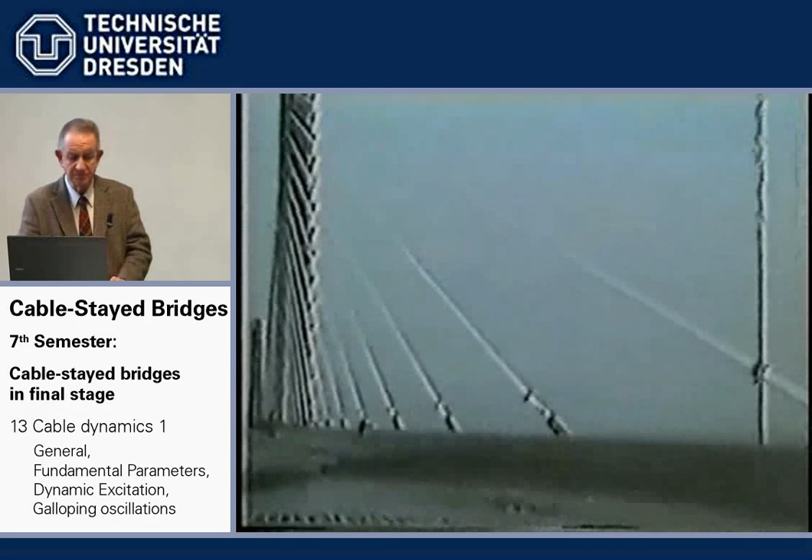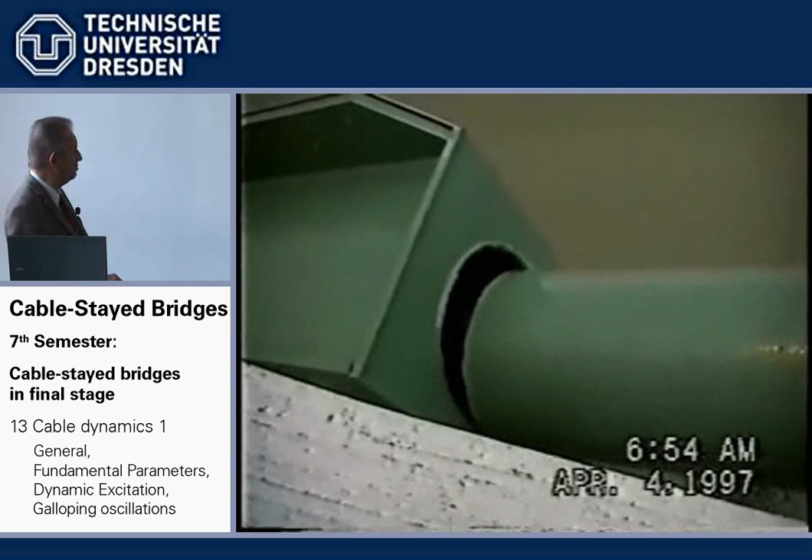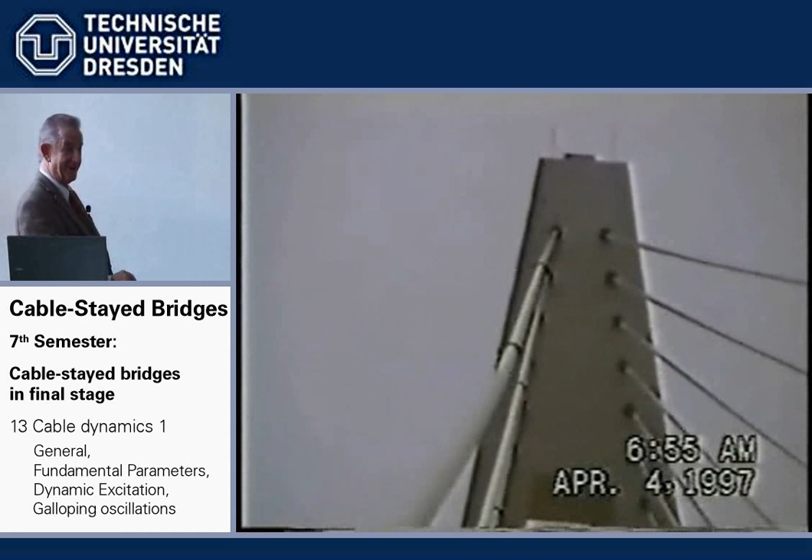This is with light rain and light wind. It is rain-wind induced vibrations on a bridge, and you can see, well, you can't see very much, I'm afraid. It was just, of course, the Houston Ship Channel Baytown Bridge, which we see in great detail. There wasn't very much wind, but this was enough to heavily oscillate the cables, which can damage the anchorages and which can damage the cables. So we're talking here of a real problem which can occur if we don't look out for it.

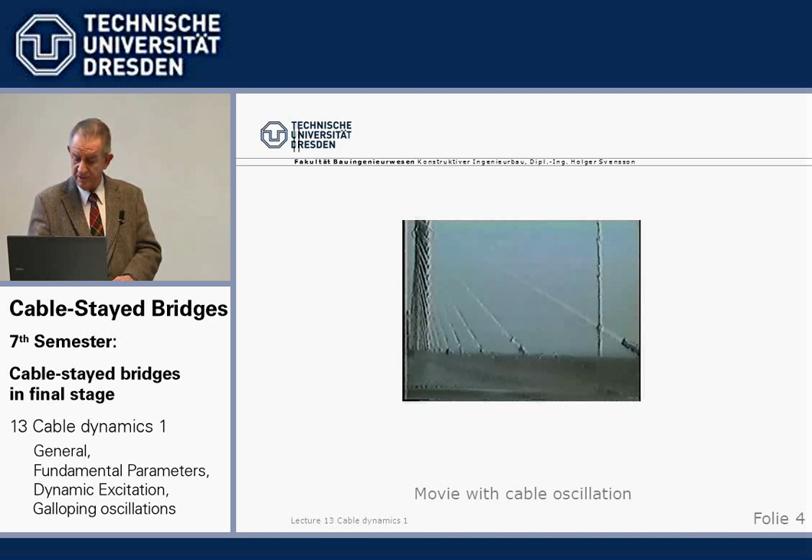Here we go. Now, very important, stay cables have very low internal, say, natural damping.

What we have done here is measure the decay of a stay cable at the time of the Pasco-Kennewick Bridge. We could show in a mathematical formula, very typical, how the decay curve runs. It was e to the power of minus 0.012. Now here we have something which is often not understood: the logarithmic decrement of damping. We know logarithm is something to the power of, and the logarithmic decrement is the power to which e has to be raised to show the decay curve. So 0.012 is in this formula, the decay formula.

That's important, that it's not something in the air. It just indicates how the cable decays when you start it by hand or with a rope and the cable oscillates, and then you measure how the amplitudes become smaller and smaller, decay with time. Here after 120 cycles it was only 20 millimeters. We started with 80 millimeters. This decay is given in an E function, and the logarithmic decrement is the power to which we have to take E.

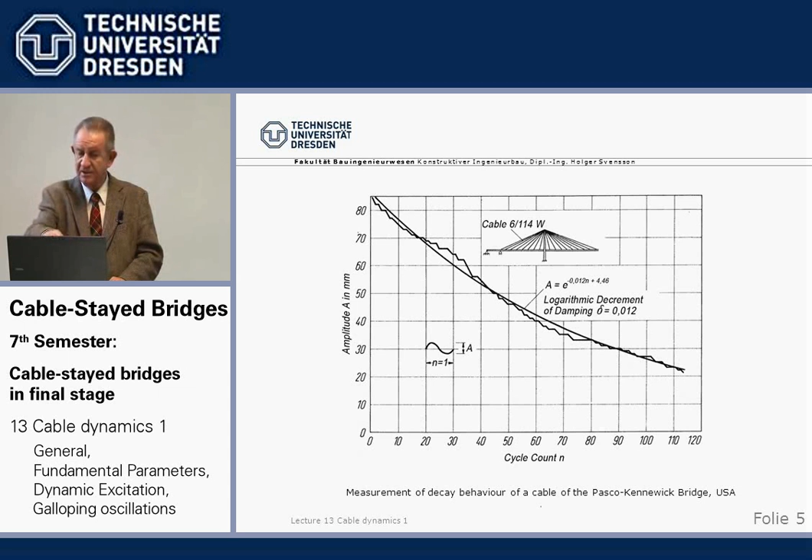0.012 is very small, something like a fifth or a sixth of regular steel structures. That has to do with the fact that we have stressless deformations here. When a cable deflects, it basically doesn't change its stress, and the force which brings it back is just the radiating force from the tensile force. If we bend it, we have forces which try to get the cable back, but it has nothing to do with inner workings. That's why, because it's a geometrical stiffness instead of a structural stiffness, we have very low damping values, the lowest in practical engineering there is. That's why these cables are so sensitive to even small wind forces. So that's what you have to keep in mind: geometrical stiffness, very low damping, 0.01 or something as the defined logarithmic decrement.

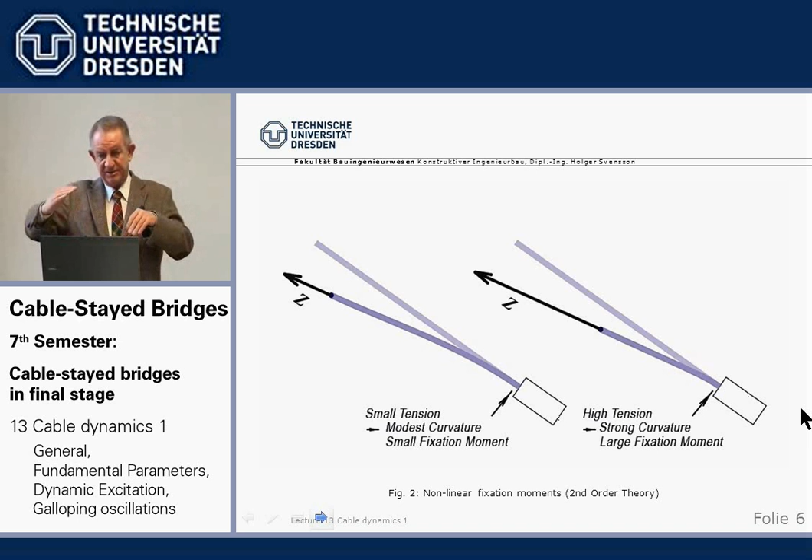The second important point why these cable vibrations are dangerous has to do with the second order effect under tension. I showed you in an earlier lecture the formulas for how this works. In principle, it is like this: if I have a cable with a certain stiffness, and I deflect the beam, there will be a deflection between the cable and the anchorage. This change of angle and the stresses from that are increased many times by the tension which acts at the same time. In first order, linear theory, we just have a certain radius depending on the stiffness, and certain stresses. However, if we have a tensile force, this radius becomes much smaller.

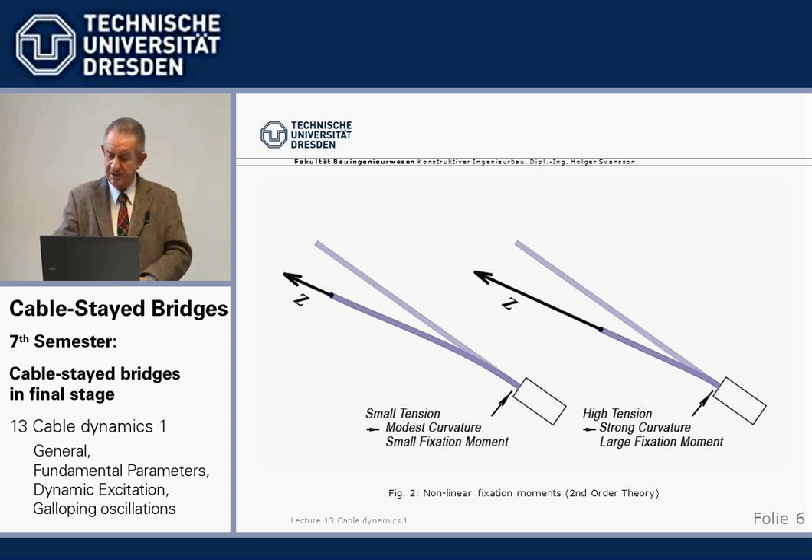It's pulled together, so to say, and this nonlinear effect due to bending and tensile force increases these stresses considerably. It's a condition in cable sizing to keep that low. So fatigue due to high bending stresses from nonlinear theory, tension and bending, is dangerous. Those are the two basic characteristics which are unfavorable: low internal damping, and the increase of bending stresses from cable oscillations due to nonlinear theory.

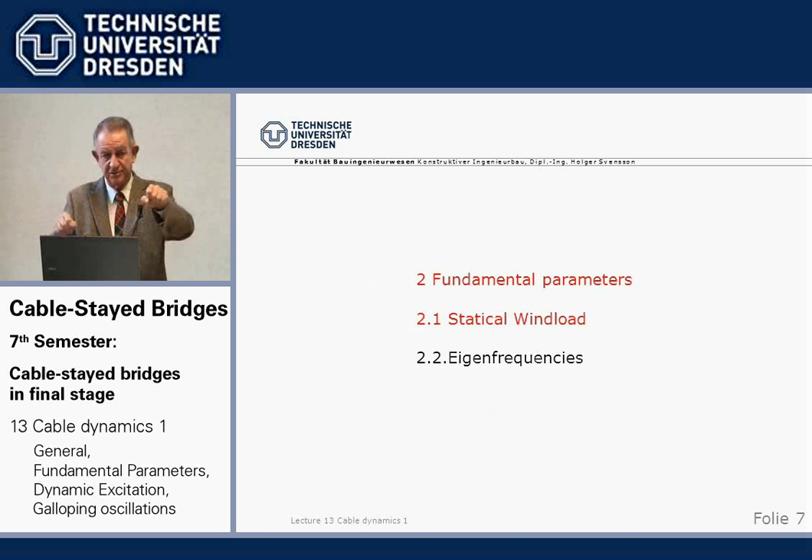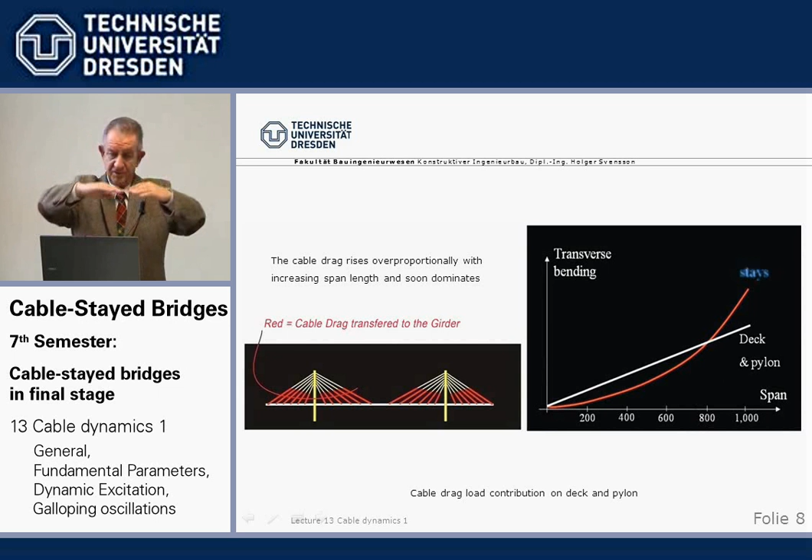For the bridge, the stay cables exert wind loads. If we have the cable-stayed bridge and the wind is blowing transversely, the static force which acts on every cable over its full length—one half goes to the tower and the other half goes to the beam. So the beam has a wind load not only from the beam itself, but also from the lower half of the stay cables. The interesting thing is, if we increase the span somewhere typically in the range of about 800 meters, the transverse bending moments in the beam from wind are bigger from the loads on the stay cables than on the beam itself. So it is an important factor for transverse bending.

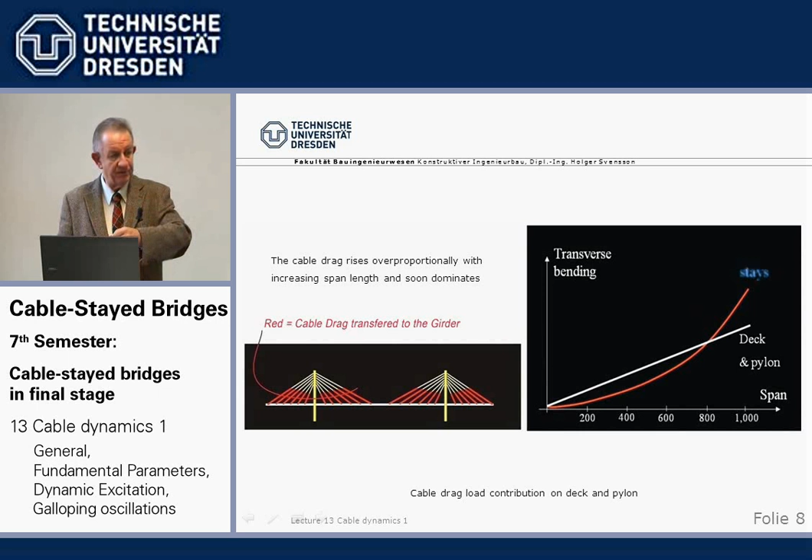The wind load on the stay cables is transferred to the beam. First, for short spans, most load on the beam comes from the beam itself. With increasing spans, that becomes a bigger part, and somewhere above 800 to 900 meters, generally the wind loads from the stay cables are higher than the wind loads on the beam itself. So it's an important sizing parameter, the wind load from the cables on the beam.

Now, how can we try to reduce these wind loads on the cables which act on the beam? First of all, the wind load is some wind speed squared times a constant, times the diameter of the stay cable, times a shape factor. The wind speed is given, so we can vary the diameter and the shape factor.

With the diameter, one has tried with time to reduce the cable diameter as much as possible. It started with a large distance between the parallel strands or wires for corrosion protection. Then compact stay cables were tried, where this is more or less directly extruded. With the wires, since these are fabricated on site, we cannot make these too tight - we have to thread in the strands. But if we use completely shop-fabricated HiAm parallel wire stay cables, then the PE pipe can be directly extruded very tight. So in practical terms, for big bridges, maybe 20 years ago there still were 300 millimeter diameter stay cables, and they are now reduced to something like 200 millimeters. So what has been done there to reduce the drag has been done.

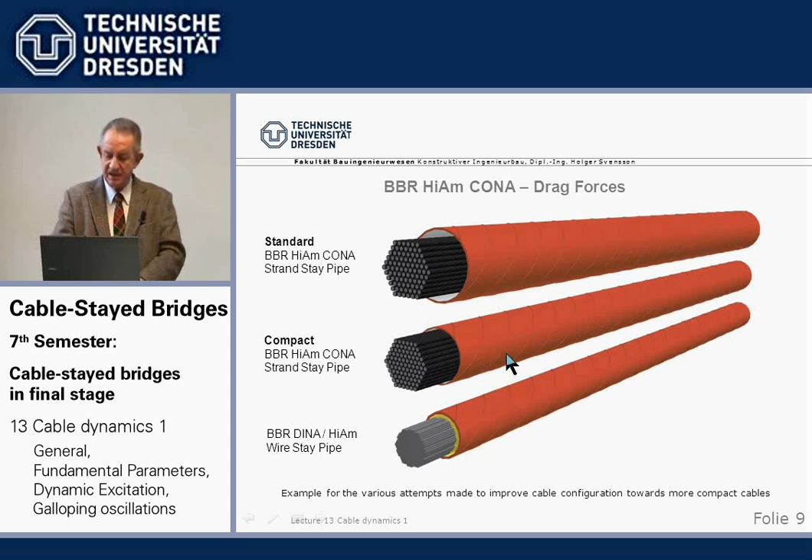The next question is the drag factor for a circular cross-section. It's interesting that this is not just some constant value - we have here the C factor, and we have here the Reynolds number. The Reynolds number is basically the wind speed times the diameter of what we are talking about, divided by the kinematic characteristics of the air, which is a constant.

If we use stay cables, we can give this factor as a cable diameter, which is much more helpful. We see here say 5 centimeters, 10, 15, 20, and so on. Now the interesting thing, as I've mentioned several times, is that Reynolds to the power of 10 to the power of 5 gives a change in the internal characteristic of the wind, from laminar, just steady, to turbulent, with vortices and all that. That's always a very important point in all bridge engineering, this Reynolds factor of 10 to the power of 5.

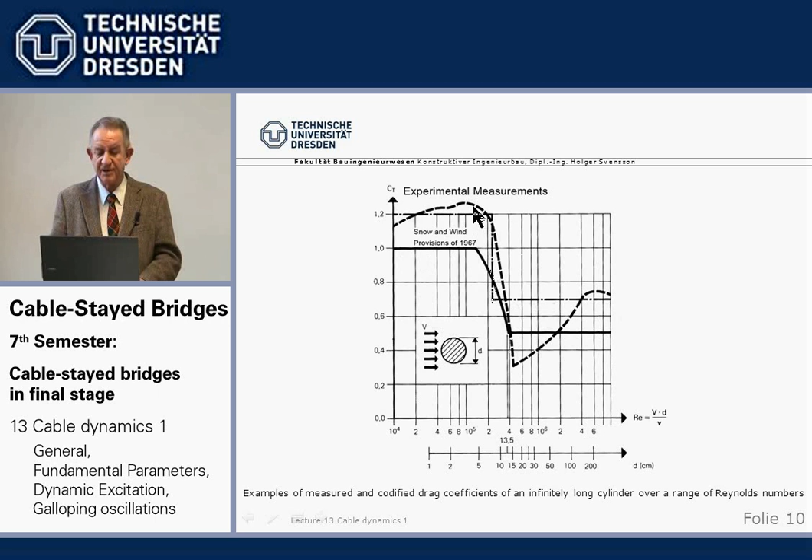For the diameters we use, up to 10 centimeters, we can use low factors which are codified. These are some old codes here in that range, somewhere between 0.5 and 1.2 as a drag factor. So if we now say, okay, we accept from these various code regulations all over the world, we accept 1.2 up to, say, a diameter of somewhere 10 centimeters of a stay cable - that's easier to understand than the Reynolds number here underneath. And then we accept, well, 0.7 to 0.8. The codes vary there a little bit. So that's the drag factor.

That's a natural constant. I just point out here an interesting phenomenon which we will come up later. We can further reduce the drag factor, meaning the resistance a cable has against the wind, by profiling the surface. At first it sounds a little strange - how can you, if you so to say roughen the surface, how can the drag factor, the resistance, go down? But it does, because there is a change in the internal structure of the wind as the cable comes and goes around, and the vortices are further pulled out. The point where these two go into two pieces is further to the leeward side. If somebody of you plays golf, you may know that the later golf balls have little dimples on their surface, and these dimples reduce the drag on the golf balls.

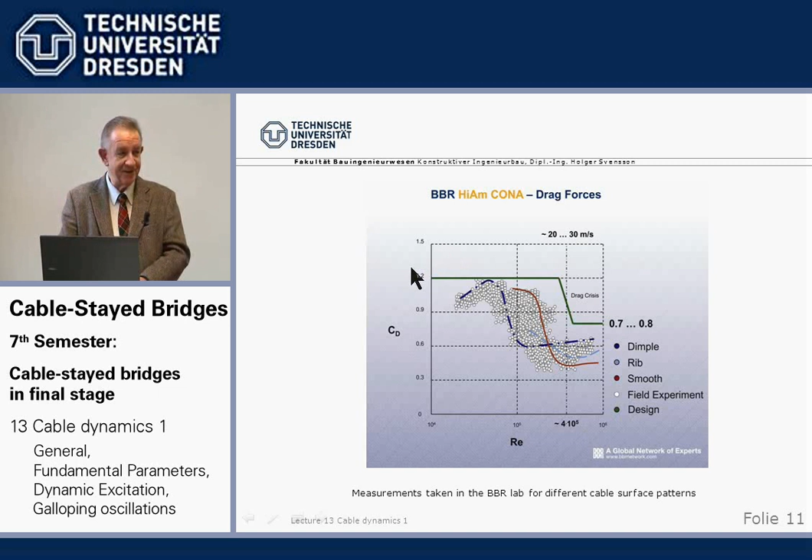Of course, whenever we start to calculate anything with cables, the first thing we need are the eigenfrequencies. Very simple. We just have to remember the eigenfrequency of a cable is proportional, first of all, to the square root of the cable force. The more taut a cable is—think of a violin—when you pull that, the faster it will oscillate. That's very simple. And on the other hand, it's indirectly proportional to the length. We have a feeling when the cable becomes longer and we start to push it up and down.

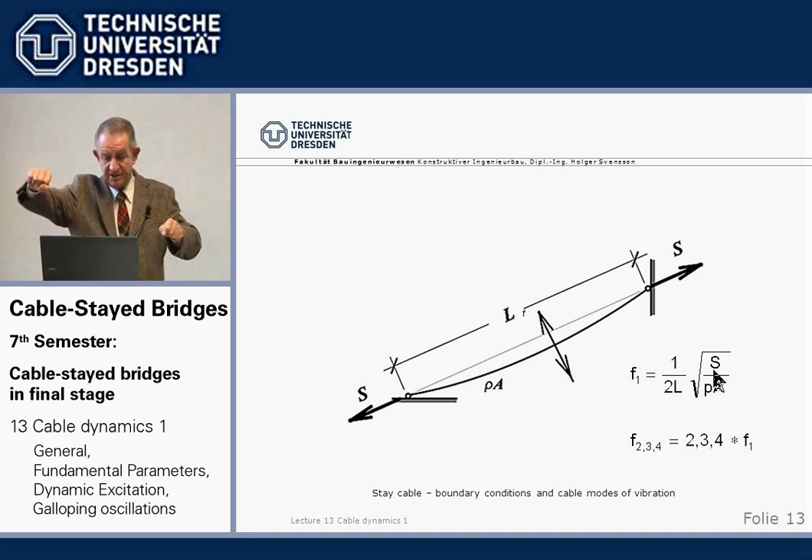That's the first eigenfrequency, which I think in 95% of all phenomena in dynamics, we only deal with the first eigenfrequency. The others are an octave higher, we know all that, but they are linear. Just remember: proportional to the square root of the tension and inversely proportional to the length.

Now we come to the dynamic excitations. And there we have, in a very general way, not only for stay cables but for all dynamic phenomena on buildings, to distinguish between catastrophic events, which can go beyond all limits and basically destroy the structure, be it a cable, a bridge beam, a lamppost, or a high-rise building. So there are some nonlinear effects, and we must understand how the energy required to destroy a structure is taken out of the airstream. Those are the nonlinear catastrophic things.

And then there are others which are more static in nature. That means we get deformations or cable oscillations, but they are limited. It's basically a static load, not going beyond all limits, pulling more and more energy out of the stream like the catastrophic ones, but more a static load which gives a limited oscillation or deformation. Those two are from outer wind sources. There is also internal excitation—we don't need wind for that. That has to do with whether the eigenfrequencies of the beam, tower, and cables are in certain relations, 1 to 2. That's what we basically have to discuss in dynamic excitations.

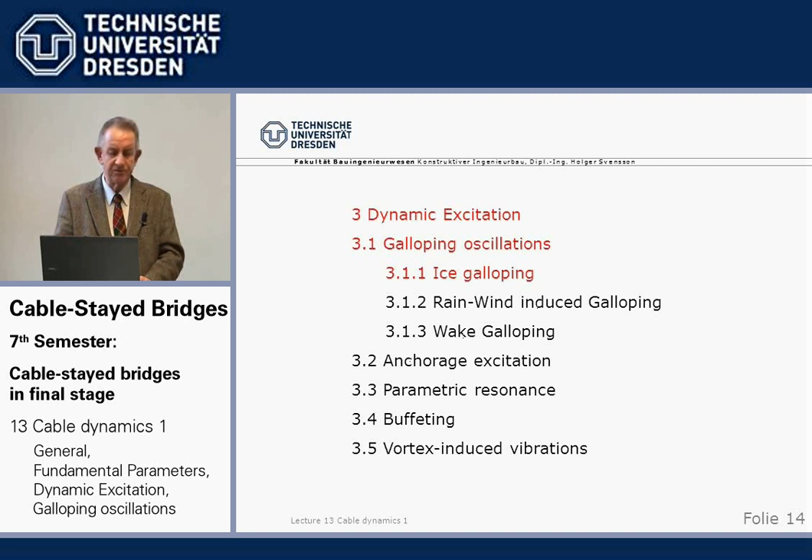And we start with one dangerous and not yet fully understood phenomenon—basically the galloping—but the most important then is the rain-wind induced vibrations. Now I want you to understand, it's rather important, the phenomenon of galloping.

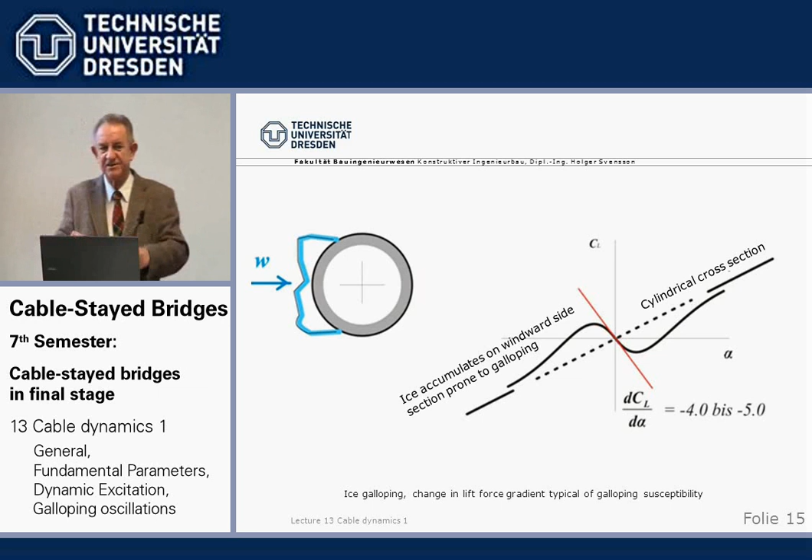Now, a special case of deforming a circular section to something where the wind can get hold is the so-called rain-wind-induced instability. What happens is that with light wind speeds, now 10 meters per second, times 3.6 is 36 kilometers, if that tells you more. It's a lower wind speed.

And rain. We have the phenomenon that at the top side, a little bit to the leeward side, and at the bottom side, the rain just doesn't run away, but forms small rivulets, small little rivers of water up here and down here, which are kept in place by the wind going around the cable and exerting certain forces. And these little rivulets apparently are sufficient to cause galloping, important galloping oscillations.

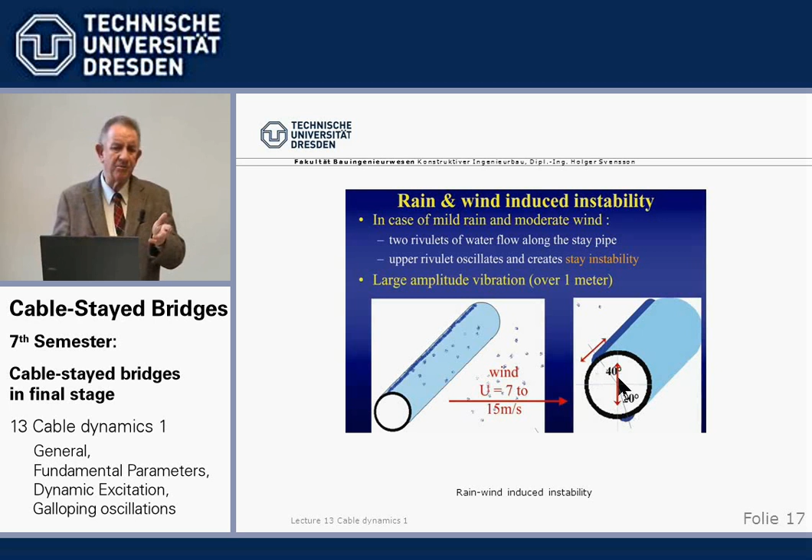What we've seen here in the first movie were galloping oscillations, light wind and light rain. You saw the cables were going up, down a meter. So it's an important phenomenon. Remember: low wind, little rain, forming rivulets which make from the circular shape some deformed shape where the wind then can get hold.

The thing is, I always say, rather new. When I started doing cable-stayed bridges, it wasn't known in the 70s. And then somewhere, somebody in Japan detected it and investigated it. And then all the other stay cable bridges learned from it and also applied it. It's a phenomenon which came up in the last 20 years.

Well, it probably has to do with the fact that cable-stayed bridges have become, first of all, longer spans, lighter, and so they are more sensitive. But this phenomenon wasn't known 30 or 40 years ago, and it's not fully understood, and I'm quoting here Kovacs. It may not be surprising if I don't understand it completely, but Kovacs says he doesn't understand it, or nobody really fully understands it today. So there are still some uncertainties.

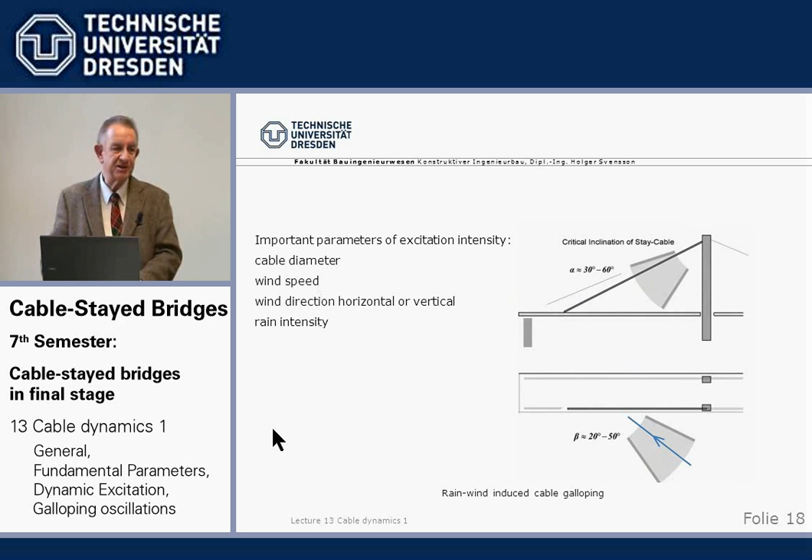But the phenomenon is there. I've shown you the movie, and there's another one later. Now, excitation parameters are the cable diameter itself, the wind speed, the wind direction, and the rain intensity, for example.

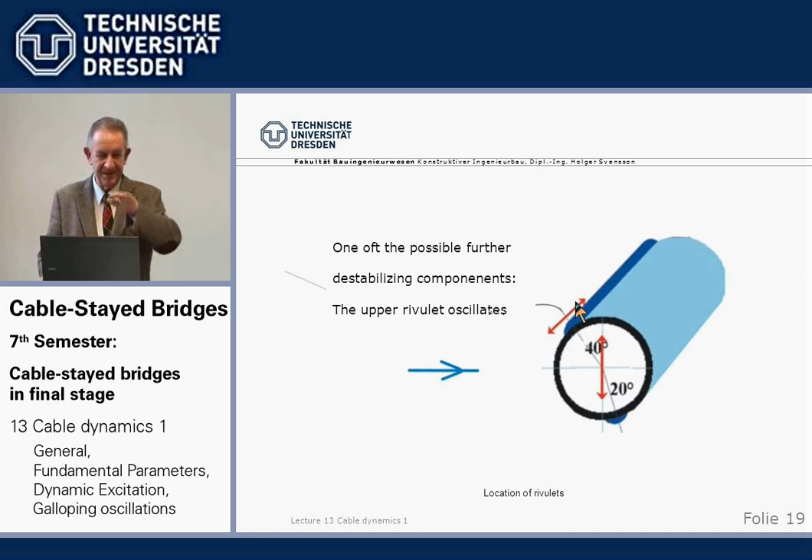If we look closely in the laboratory, it was quite a success that after many years of trying, the phenomenon had been reproduced. That was one of the puzzling things initially: you saw it on the bridge, beautiful, but in the laboratory, putting the cable on with the same dynamic characteristics, wind, rain machine on, you couldn't reproduce the darn thing. The Japanese succeeded for some time, and then they saw that in addition to forming, the rivulet itself also oscillates, and there may be something mathematically difficult to take out.

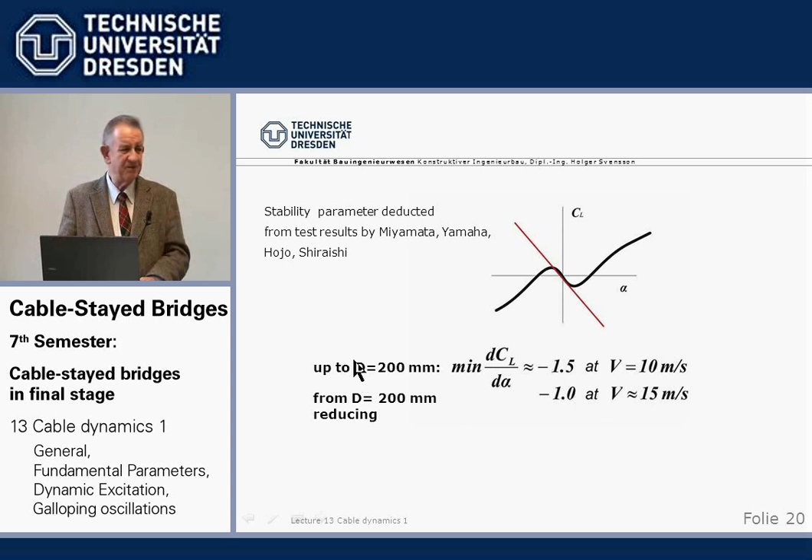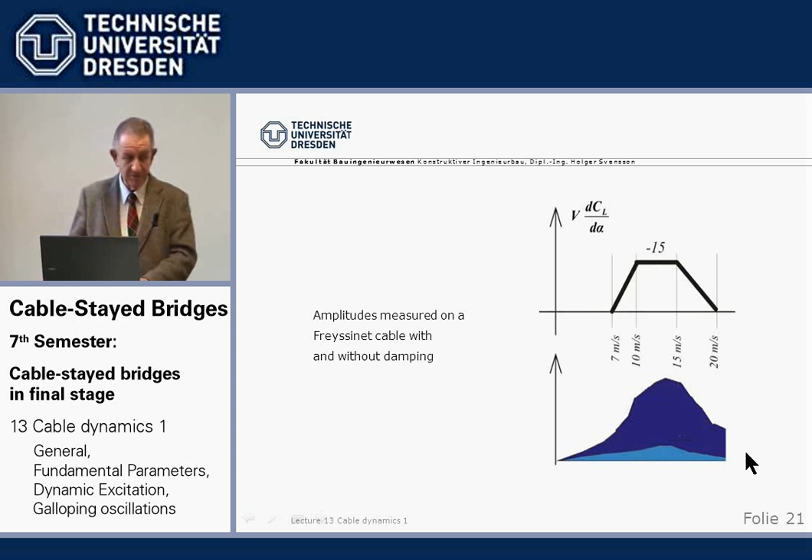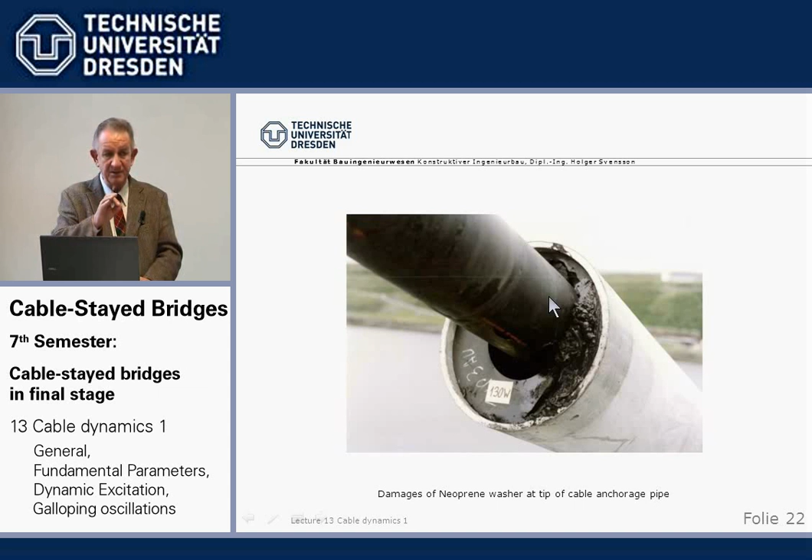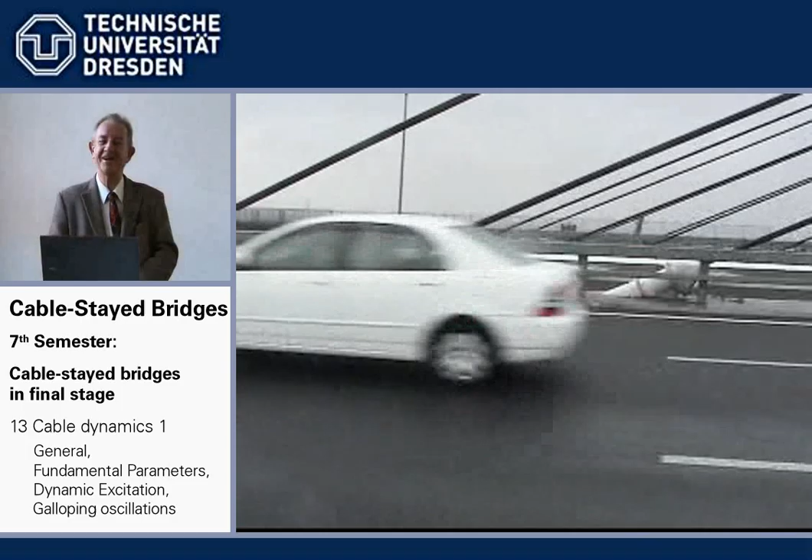And now we will go to the next movie. I agree, it's a little unattractive theme.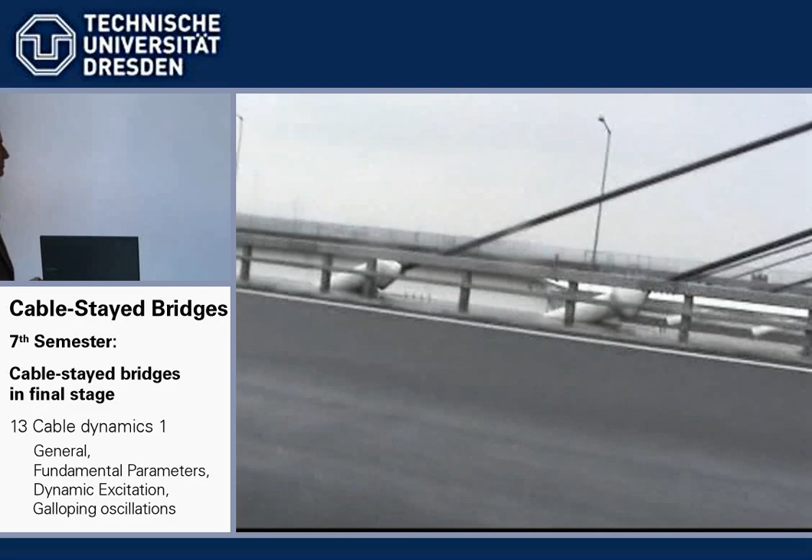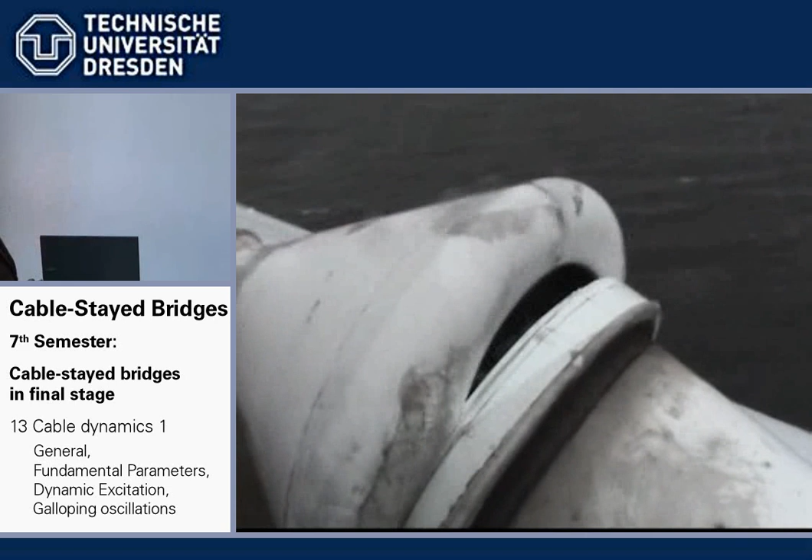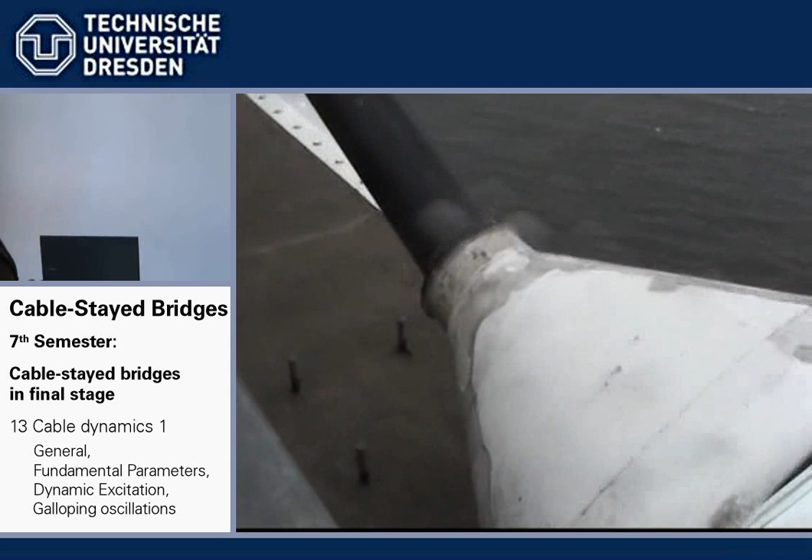This is now in Japan, probably just with a handy camera, taken from a moving car in the rain, so the quality isn't good, but you can see how the cables vibrate. Here you have the problem at the anchorages, where the neoprene boots are being pulled out. Just see how wildly they go about.

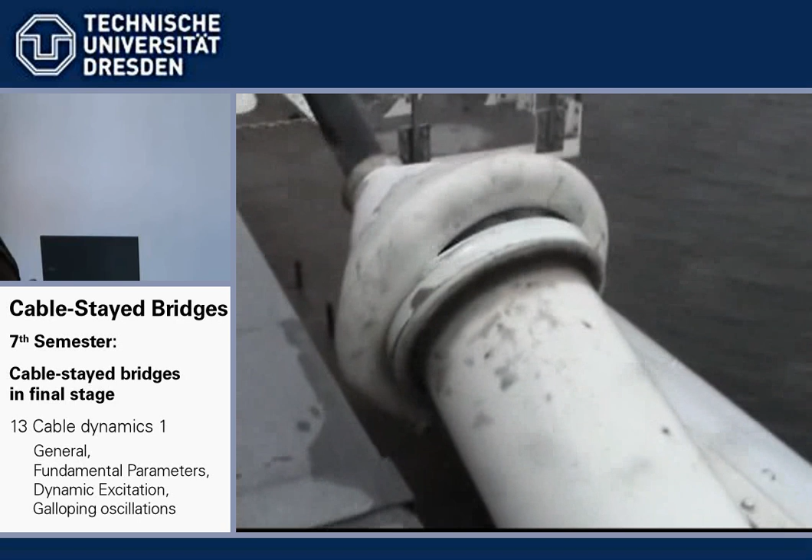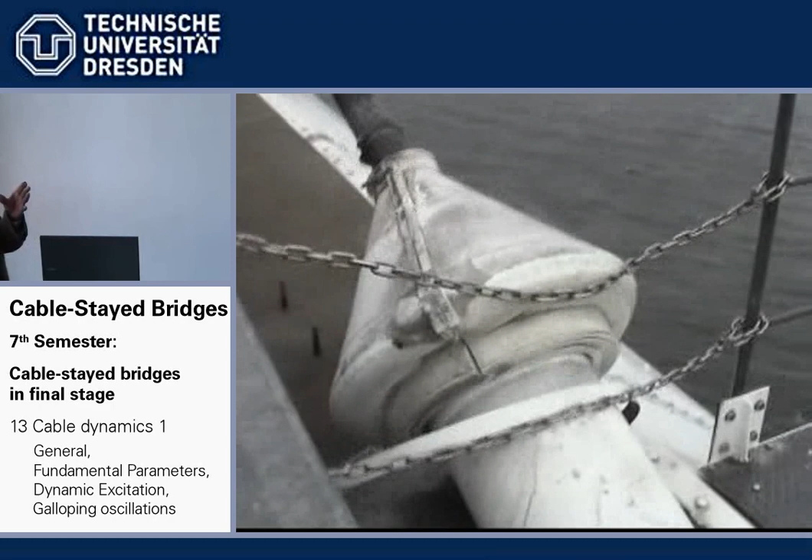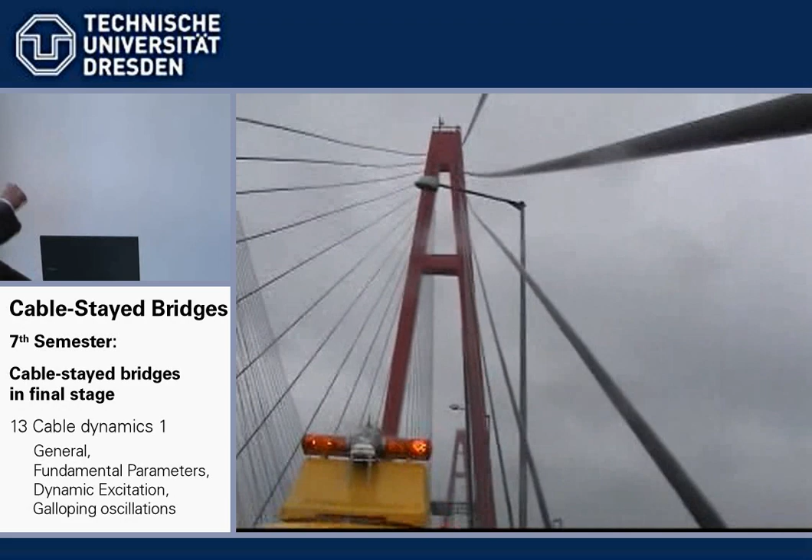It's obvious, generally, there are always groups of cables excited at the same time, groups of cables with similar eigenfrequencies and so on, not all the cables all the time, but different groups at different times. Here you see again the highway patrol, how hard they act.

This was the first part, where I have concentrated basically on the basic parameters and on the most dangerous phenomenon, wind-rain-induced vibrations. I hope with those movies I've made you aware that we are not talking just some philosophical mathematics in the air. It's a real problem which can destroy or severely damage stay cables, and we have to be on the watch out.

I've tried to show you the mechanism by which the cable system draws energy out of the horizontal wind. It draws energy out, on one hand, by changing the relative wind direction, adding the horizontal wind to the actual vertical velocity of the oscillating cable, so that we get a change in overall relative wind angle of attack. On the other hand, there's this phenomenon, depending on the cross-section, where we have a change in the lift factor going up and through zero going down.

In the moment the cable goes up, it's pushed up by the combined wind speeds. The moment it comes down, goes through zero, the sign of the lift changes to compression. So while going up, it's constantly pushed up, while going down, it's pushed down. Even if it's a small force, if applied in phase, always at the right moment, you can increase the amplitudes theoretically beyond all limits, or, as you've seen on the movies, into the meter range. Okay, thank you.